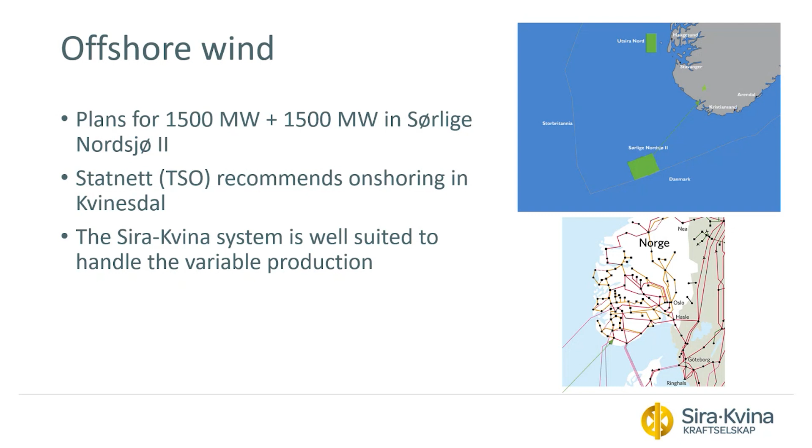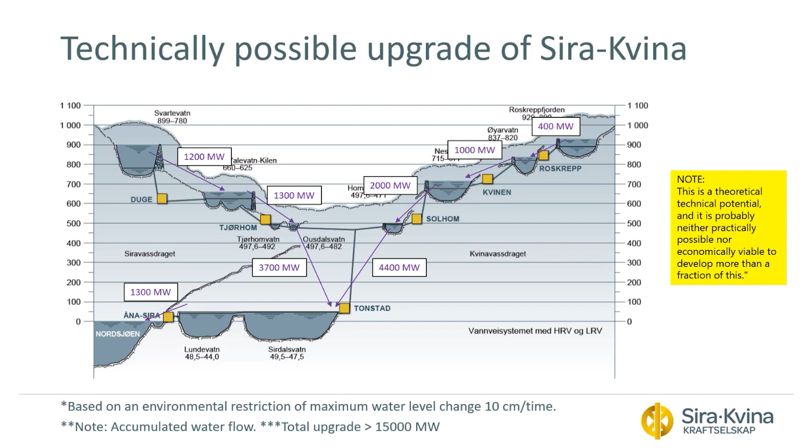So it's incredible potential. But I had to put this disclaimer over here, in yellow, that it is a theoretical potential. And it's probably not practically possible, or at least it's not economically feasible to make all that happen. So we will not build this tomorrow. Hopefully one day, but not tomorrow.

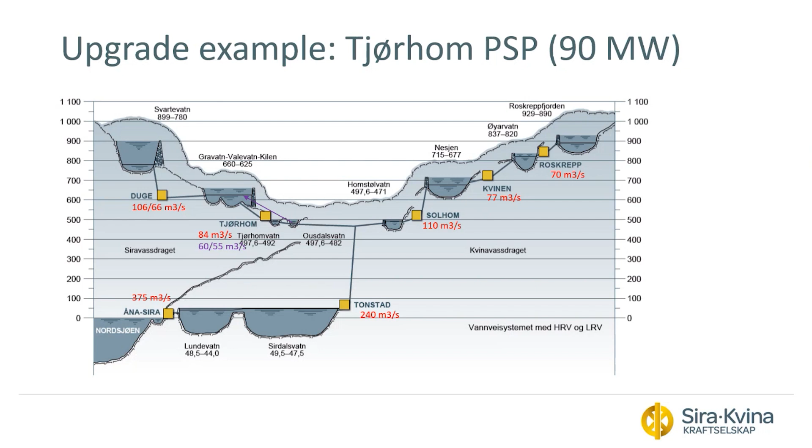So by making this power plant, we can pump from here in those situations, when the price is very low and water is coming and we don't want to use it. Then it looks like this. Today, we have a lot of inflow and we have to produce at low prices. And then we end up with this duration curve, as we see.

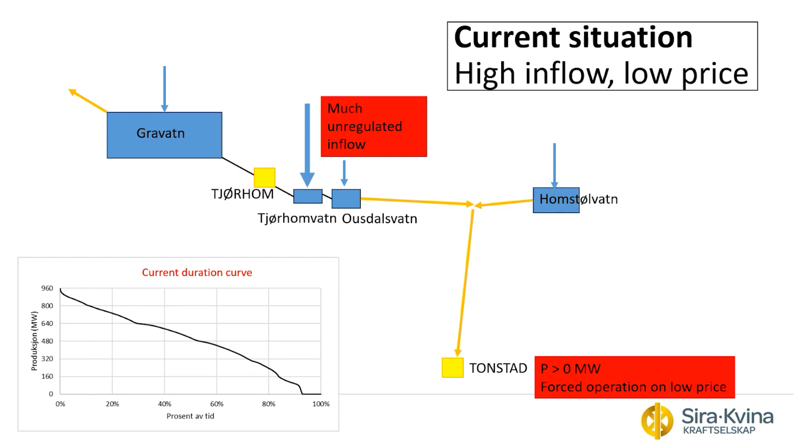What we now want to do is to instead pump that water, shut down, pump at those times, and then we get closer to this duration curve. So we produce more at a good price, less at the bad price.

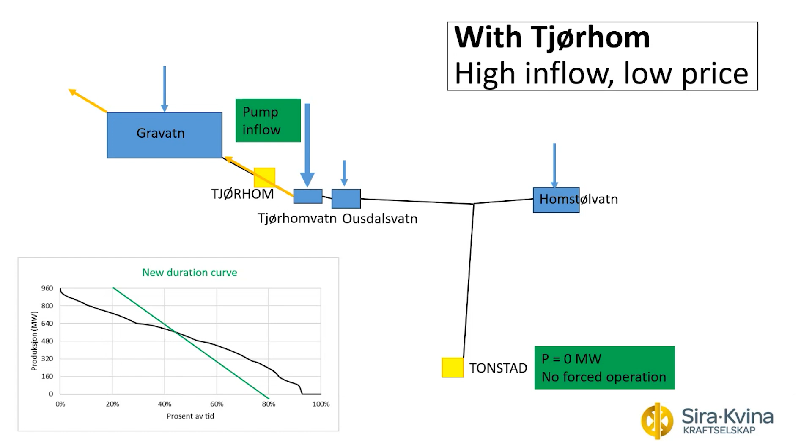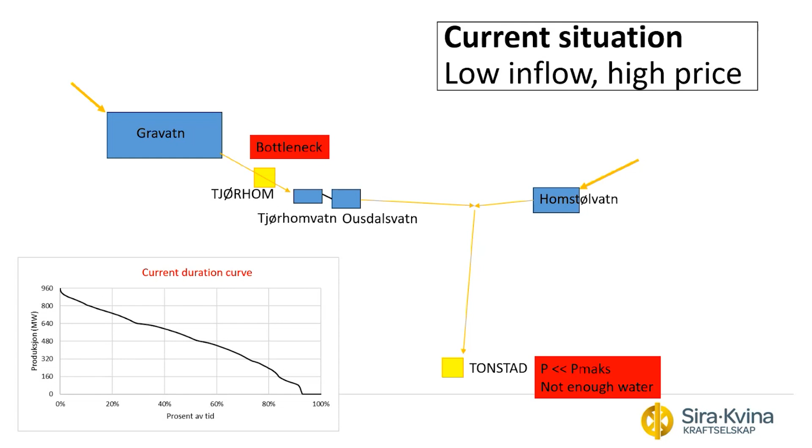And on top of it, today at Tonstad, when the price is very high and there is not so much inflow, we don't have enough water to produce maximum power. That's why here we are almost never at 960 megawatts, because we don't have enough water. So with these new power plants, we can get more water down when the price is high and inflow is low, and then we also get closer to this.

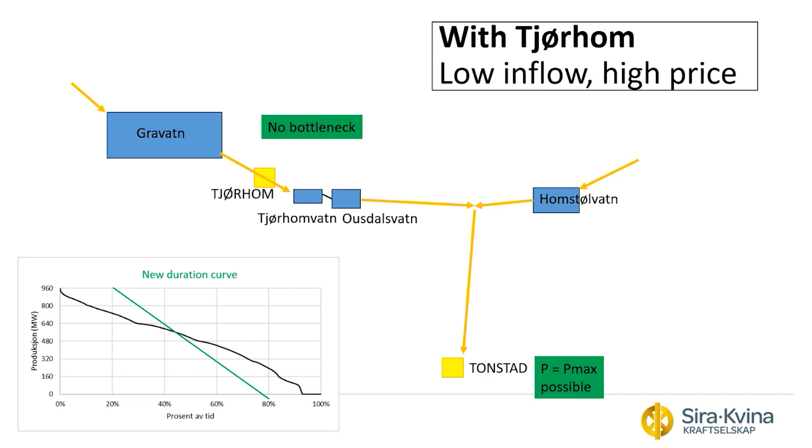We don't know the power prices in the future, extreme uncertainty. So this is kind of our challenge nowadays, we see this can have large potential, but we really have to investigate it closely to believe that we will get the money back if we invest. We're working on all this. Okay, I think I'll conclude there and then ask me afterwards if you have questions.

Thank you very much, Katka, for this insightful presentation. I think we all have a bit more of a practical view of these upgrades. So we look forward to discussing all those things with you at the Q&A at the end of the session. But for now, we will move straight into Stein-Erik's presentation.

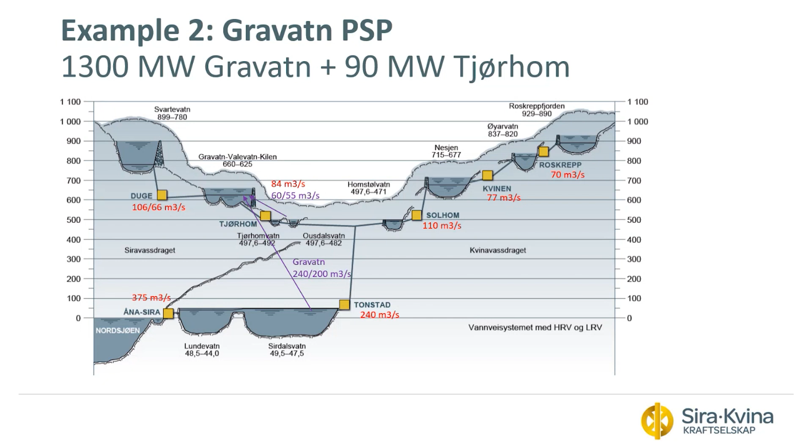So Stein-Erik Fleten is a professor at the Department of Industrial Economics and Technology Management. He is a reference in the fields of energy market modeling, risk management, and investment under uncertainty, all of which are highly relevant to our topic today, as Caspar introduced as well. So Stein-Erik, I'm looking forward to hearing what you have to say. Thank you. Thank you so much, Lydia.

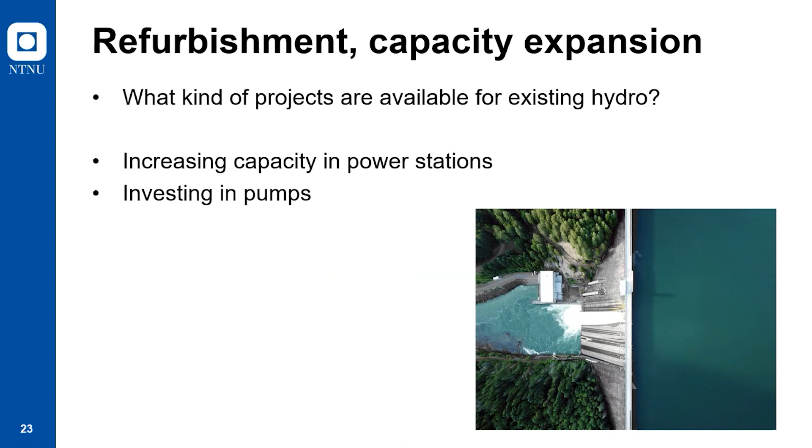So another risk for the parties involved is the changing taxation. One thing that has changed the last 2 years is the natural resource rent tax. It's been changed in terms of level. It went from 37% on top of the 22% normal profits tax to 45% in 2023.

From my point of view as an economist, this kind of tax is not the worst. Why? Well, it's so-called neutral. It means that if Sira-Kvina has a project that is profitable before the change, it will also be profitable after the change. So Sira-Kvina will still invest in this project independent of this tax change, most likely. There are details in practice, of course, but it's pretty neutral. So this is not the worst of plans.

But another tax that was introduced at the same time was a high price tax, and that's not a neutral tax. It shaves off the highest profits, and it's very detrimental to the kinds of projects we're talking about today, because it shaves off exactly the best prices that these companies need to recoup their investment. In effect it's 23% extra on top of the income above a certain level, a little less than 70 euros per megawatt hour.

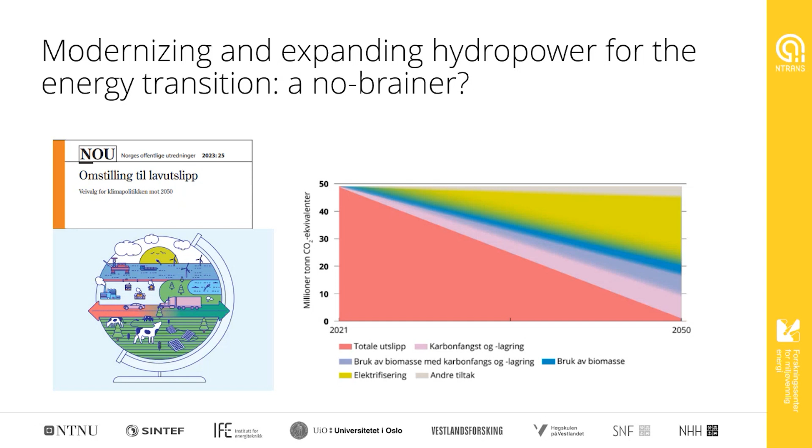Investors flocked to Norway, bought all the waterfalls, and they made enormous profits, massive profits in super short amounts of time. And the politicians were panicked to the extent that they introduced what later became known as the panic laws. Yes, I kid you not, that was their popular name. And out of this extreme free market liberalism, in competition with the more labor-oriented politicians, you had a series of these concession laws that came out of this.

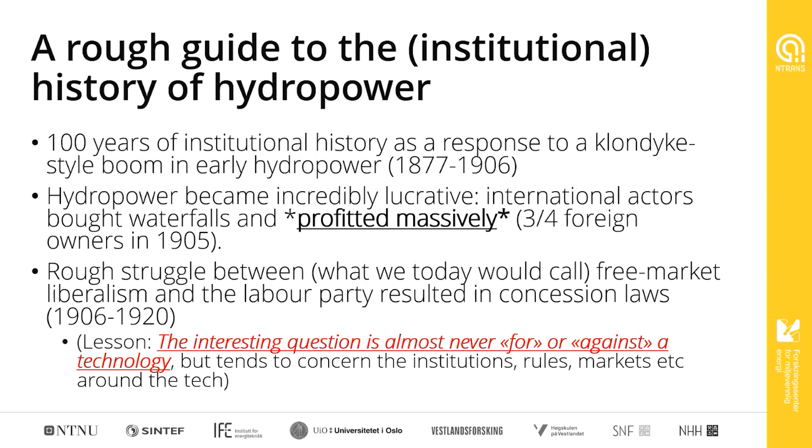And again, just to say that back then, for or against hydropower doesn't really matter. To me, then, the question is, okay, which institutions do you put in place? How do you manage the resource? How do you distribute the benefits and burdens out of this? And that was exactly the goal here, right?

You got these concession rules that are a bit special. They secured a special way of governing this resource, where you gave companies a right for between 50 and 70 years. We hear about the decadal perspective here. And there's something called Hjemfall, a huge institution in Norwegian governance of this resource, where after a company having used this resource for 50 to 70 to 80 years, depending on when it started, the resource was to go back to the state so that you could reevaluate. Are we still doing a good job? Should we revalue, or not?

And the goal here, of course, is to ensure long-term solid management of what is actually a common pool resource, which is the water, right? And the power it produces. And if you read this policy document, on this point it's pretty good. They write a bit about Hjemfall and its role in Norwegian society, and it's in Norwegian, but I'll try to translate it.

Not least, Hjemfall has contributed to providing legitimacy and acceptance. It's been legally tried, and all of these things. And they're saying that this way of organizing and dealing with this resource provides some lessons for how to think about the relationship between natural resource management and energy development in the green transition. It wasn't a very good translation on the spot, but you get the drift, right?

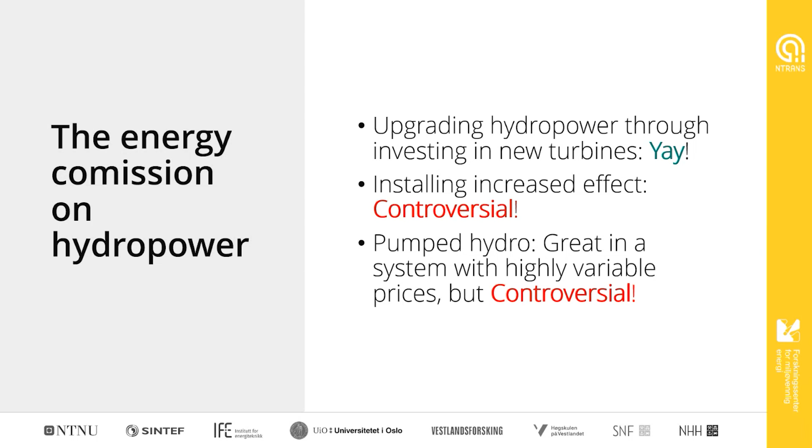And then the question is, why is it so controversial? And my argument is that, of course, it has to do with nature, the environment, the local place, these kinds of things, but it also has to do with the fact that these technology changes tend to entail institutional change and political change and social change.

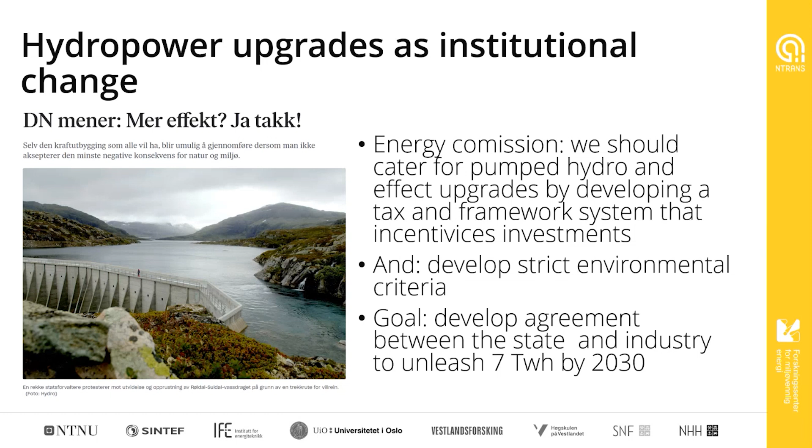The Energy Commission, this is what they recommend, should cater for pumped hydro. They should strike a deal between industry and the state to provide 7 terawatt hours by 2030, but you should also develop environmental criteria. And zooming in on what this might mean, and what it tends to mean, is that when you renew a concession, and I think the first speaker probably has a lot more experience on the practical side and struggles about these things than I have, it means you have to reevaluate the environmental criteria.

So the question then is, do we have the same environmental standards today as we had in 1950 and 1960? In most instances, you would clearly say, no, it doesn't make sense anymore. We know better than they did in the 50s and 60s. There's a strong EU integration now, right? These massive discussions about whether or not Norwegian hydropower is affected by the EU taxonomy for sustainable investments. And there's been strong pushback actually by the industry, and we can discuss if it's true or not, to some of these developments.

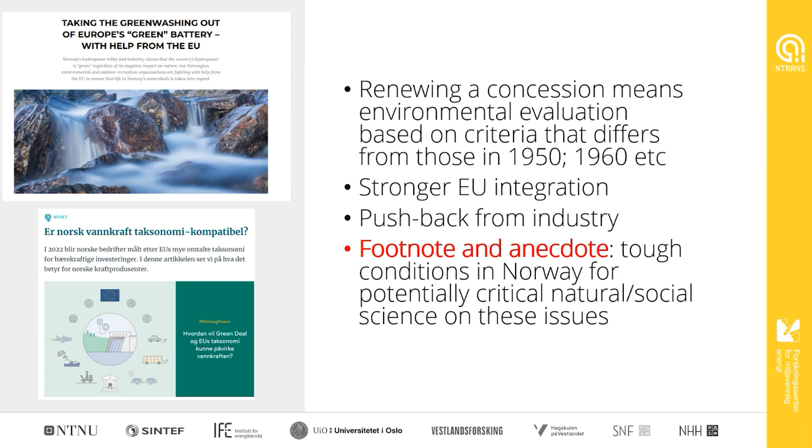And as a quick note, I will not say which project or which actors, but I know that there's been research in Norway where industry has strongly pushed against doing studies on acceptance and on nature-oriented issues in Norway. So I have colleagues who have had to go to Sweden to study these things, right? Because they haven't been allowed in Norway. And you're laughing because you know what I'm talking about. So this industry is also an industry which is not neutral. It's been quite conservative on these issues.

This is now a bit speculative, because I'm basing this next part of the story, which is also not part of my research, on some newspaper coverage. You should always be careful about that. I haven't researched this very properly. But this is a case that has been heavily debated in Norway, right? Or at least in parts of Norway.

And it's a case where a company called Hydro, many of you know it, they acquired one of these concessions in 1962, so a long time ago, to develop Røldal-Suldal, a place southwest of Norway, and they have developed this to fuel the Karmøy industrial sites that Hydro has down there. And what they've done, and it's all legal, so this is not saying that it's a scam or anything like that, but through various ways of working, they've been able to challenge this idea of hjemfall by developing a new company. So they've merged parts of Hydro with Lyse to develop a new power company, and they're doing an upgrade now.

The upgrade is in the order of 5 to 7 billion NOK, I think, maybe a little more. It's a massive project, right? You heard from the first speaker. When you hear upgrade, you can think that it's a little thing, you just do the same. It's a massive project. And the environmental aspects have been hugely contested.

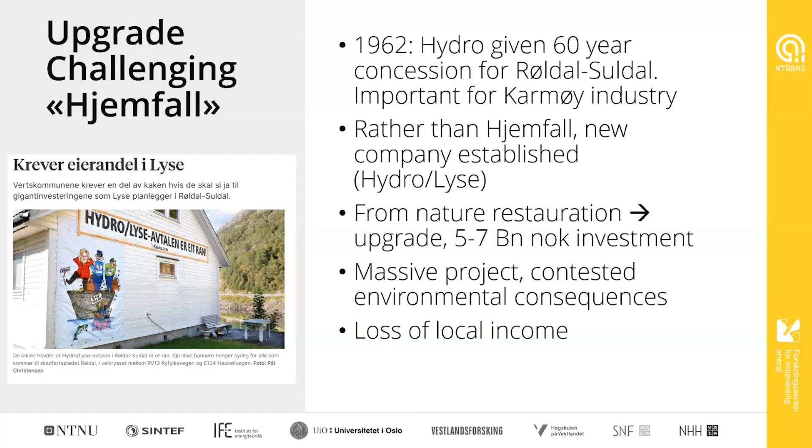Another part of this, which has been just as important, I think, is this loss of the hjemfall, which means that the municipalities here, they at least claim that they get a lot less than they originally would, and they get no ownership in this, which they would if the regime had remained stable policy-wise as it was. So these are a lot of the discussions, right? Who should benefit from this? Who should earn the most? And then we heard Rob talk about risk here, and that's also a question, I guess.

If you look back in time to the 1950s and 60s, I think I'm out of battery.

If they would have been awarded this with today's standards... so they kind of had something for a long time, and we then hold on to that through making some tweaks to the institutional configuration. So what does all this mean in terms of transition?

Well, there is currently a massive lack of public legitimacy for the energy transition. I mean, no political project these days is more contested in the Norwegian and European context than this energy transition. And part of this, in general, is due to a lack of trust in these actors and that they are taking care of these resources for the good of society. There's a clear unequal distribution of benefits and burdens. And the already very wealthy and powerful tend to gain from these situations where there's systematic

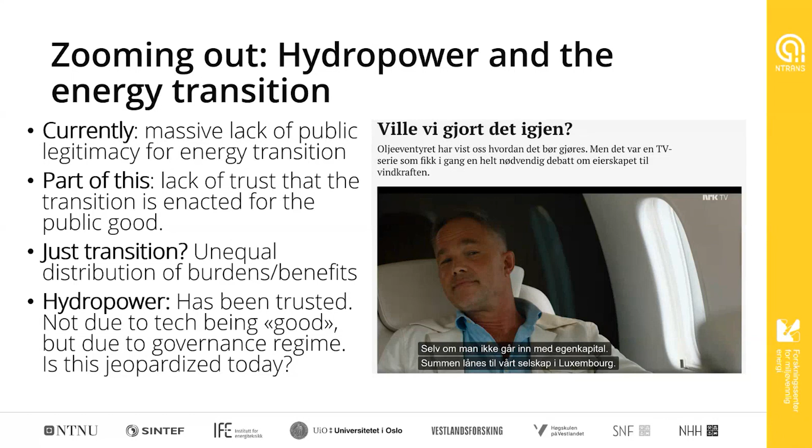losses going on here. And in a Norwegian situation, hydropower has been extremely well trusted. And my fear is that we may be jeopardizing that now. Although, caveat here, further research is needed on that part.

Okay, to wrap up, the most undermining in discussions, I think, is being for or against technologies. So don't do it. Just don't do it. The political context, institutions, culture, the concrete practices, relation to nature, economy, all of these things always matter, and they differ between sites. So we need to understand that, right? And that means that we also need to take care of these things when it comes to upgrades.

And what that means. So when we change technologies, we change all these relations, and that means that we also need to think about the stories that we tell the population about why we need this stuff, right? Which society are we going to? So I think that's my story.

Thank you very much for this eye-opening presentation. We will finish this round of presentations with Ana Adeva Bustos, research scientist at SINTEF Energy. She's responsible for the ReAdapt project, which looks into adapting hydropower to future climate extremes. Her research focuses, among other things, on interactions between hydropower and the environment. So her input will be valuable to our discussion. Anna, take it away. Thank you.

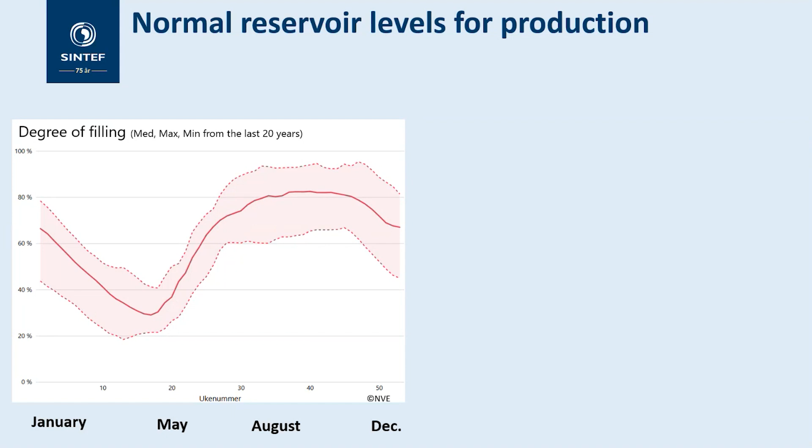But first, let's talk about what is the traditional way of managing a reservoir. So in this case, we have the typical curve of filling the reservoirs, and we see the max, the min, and the median over a year. And there are two specific key points. The one is when the reservoir will start filling, and it also matches the snowmelt period.

And here is a video of Roskreppfjord, one of the upper ones in the system of Sira-Kvina. And we see how the ice and the snow are melting, and then the water levels rise. And then it will stabilize during summer until winter, where we actually start needing the energy, and then there will be production and water levels will be reduced.

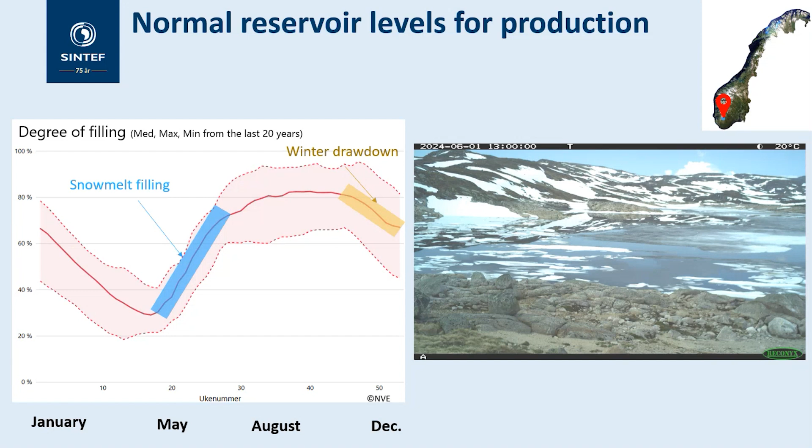But this picture will change a lot in the future if we have pumping. There will not be this way of producing. The water levels will be increasing and decreasing, increasing and decreasing much more often.

Another important aspect is that the reservoirs actually have a dynamic in temperature, and you can have two times a year where the water is mixed, that will be spring and autumn, and then two times a year where the water will be in a thermal stratification. So in summer, you will have the warmer water in the upper part because it will be heated, and then colder down. And in winter, there will be ice, cold water, and then warmer water below on the bottom. And you will understand that this is important because it will also be impacted by pumping, and it's also impacted in the traditional.

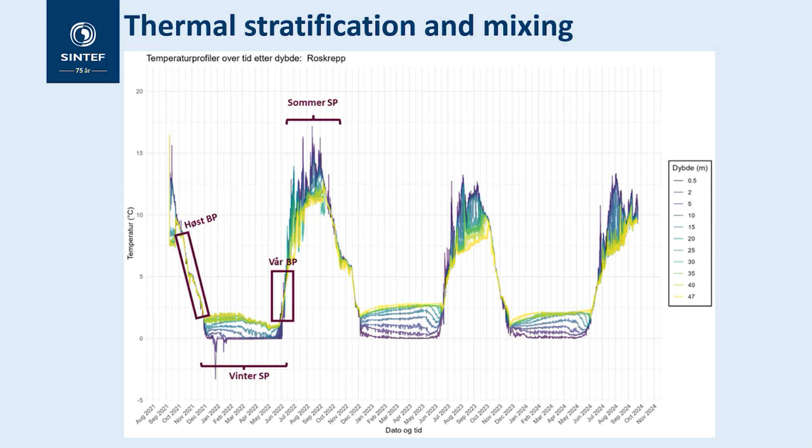The picture is from a sensor that we deployed in August 2021 in Roskrepp in the Sira-Kvina system. The sensors are deployed at different depths in the reservoir, so we can clearly see these periods that I just mentioned: mixing during spring and autumn, and then the stratification during winter and summer, and also the inverse stratification where the deepest sensors are measuring the warmest water.

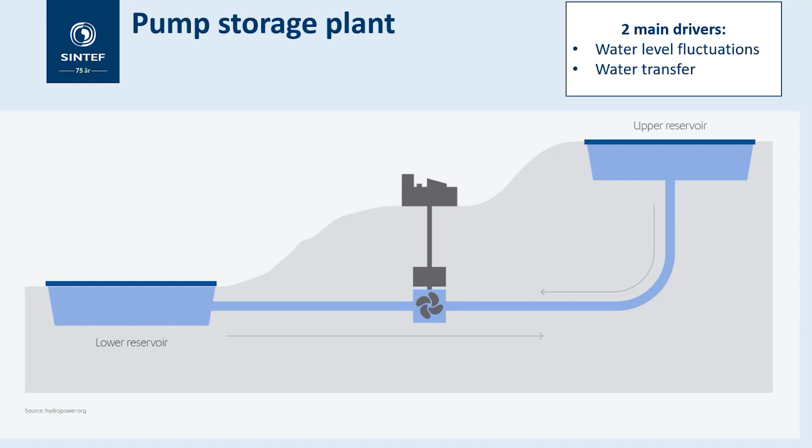So what are we going to expect? When we have pumping, we will have two main drivers: water level fluctuation, and also we will be transferring water from one reservoir to another with different physical chemistry and different characteristics. So the water level will change when you produce, and then it will increase when you pump back. And of course, as I mentioned, temperature will also be transferred.

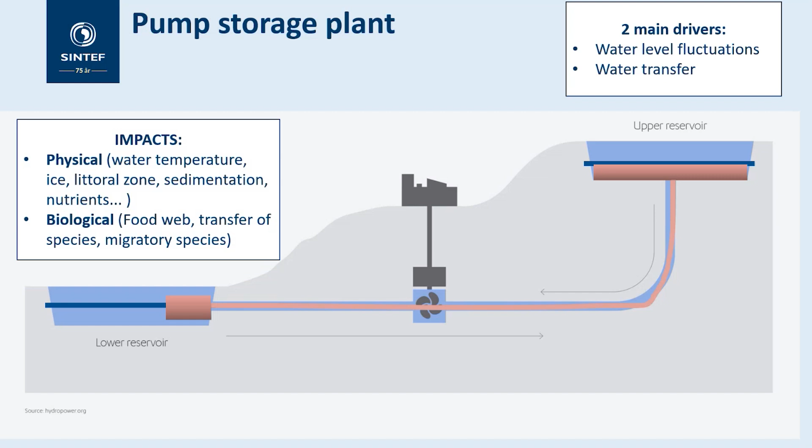So if you transfer from the bottom of your reservoir when it is winter, you will be taking warmer water into a reservoir and releasing it mainly at the surface, where it's supposed to be cold. So you are also impacting this thermal stratification. There are other impacts, for example, sedimentation problems and nutrient transportation. You will impact the littoral zone or the shorelines of your reservoir and the habitats.

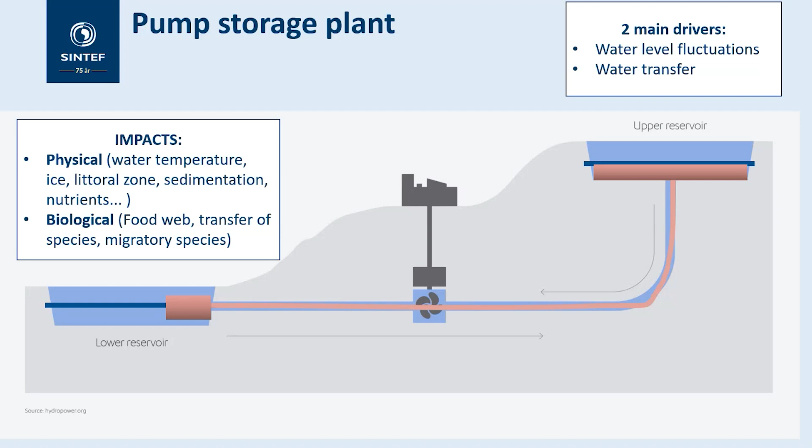And you will have biological impacts; for example, you will affect the food web, and you will transfer species, because species that live in one can be transferred to another reservoir. These can also be invasive species. And you will also impact migratory species in terms of fish, but also other species, as we have seen, reindeer, for example.

So I will show you specific examples of what we have actually simulated, because until today, we don't have a case in Norway that does pumping as we expect it will be in the future. As Kaspar mentioned, we have some pumping, but it's more on a seasonal basis. But we are expecting that this pumping will change and have much more fluctuations in the future. So I will show you examples of thermal effects, ice cover, and effects on the littoral zone.

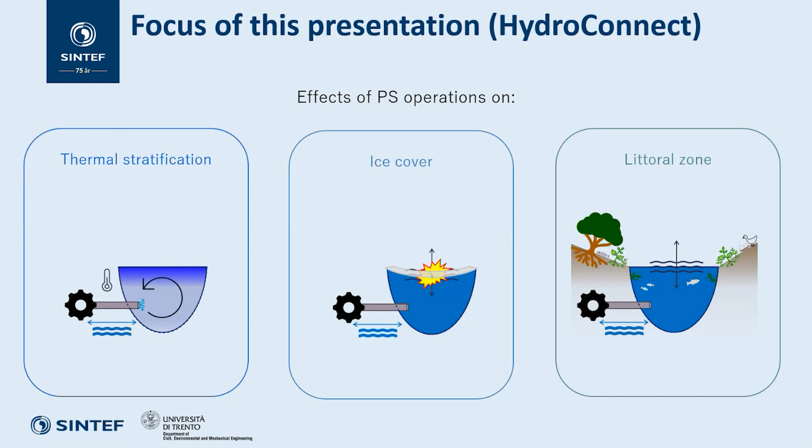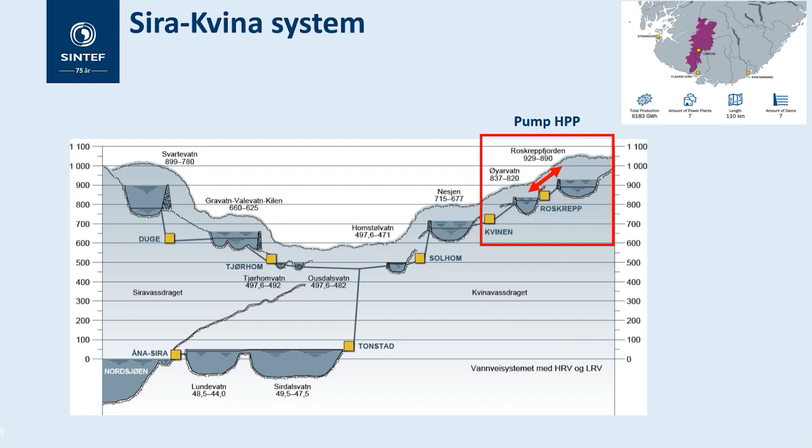So this is the system you have already seen, and we are changing from a conventional hydropower plant to pumping through our modeling. And I will show you examples for the temperature in two different segments. We have the upper reservoir and the lower one. And I will show examples on segments close to the inlet and outlet, close to the structures, and also two segments that are a bit far from the structure.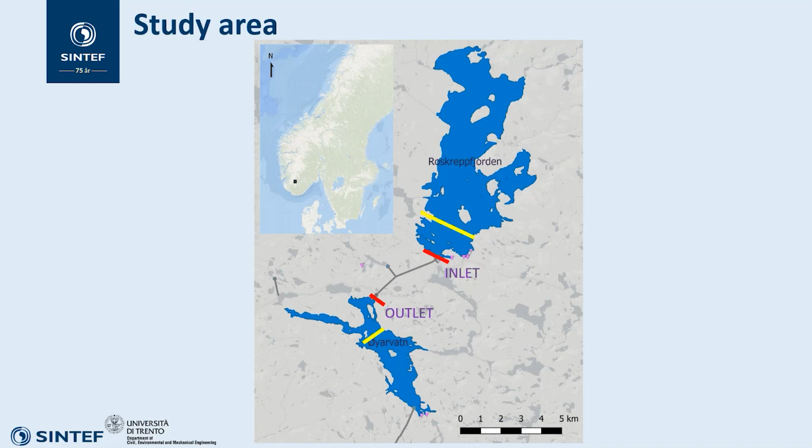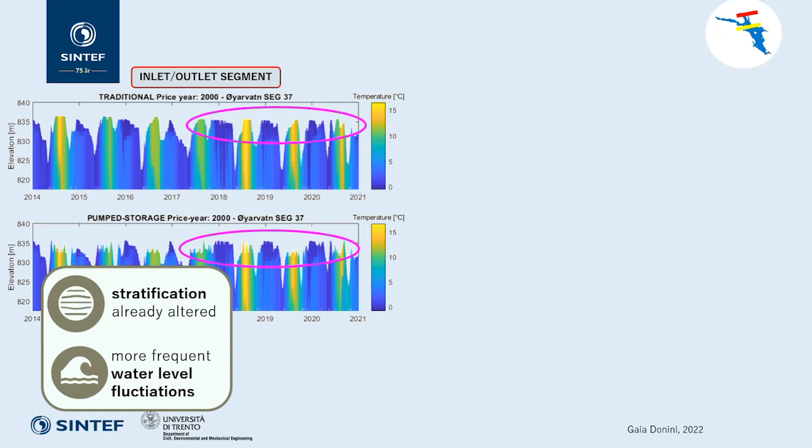We see the same in Øyarvatn, a lower reservoir close to the structure. We see that there is an impact, but because Øyarvatn was already under traditional operation, it was already receiving water, so the stratification was already altered. But what we see is more frequent water level fluctuations. And it's different from the one that is far away from the structure. So in conclusion, we see that the closer to the structure, the more impacts you will see compared with far away.

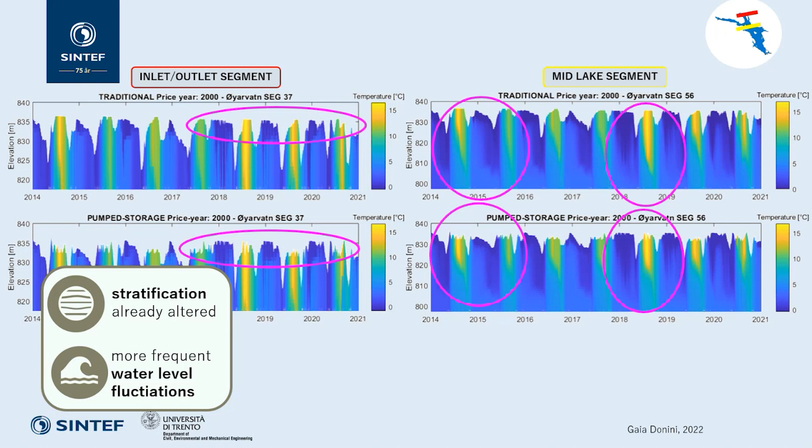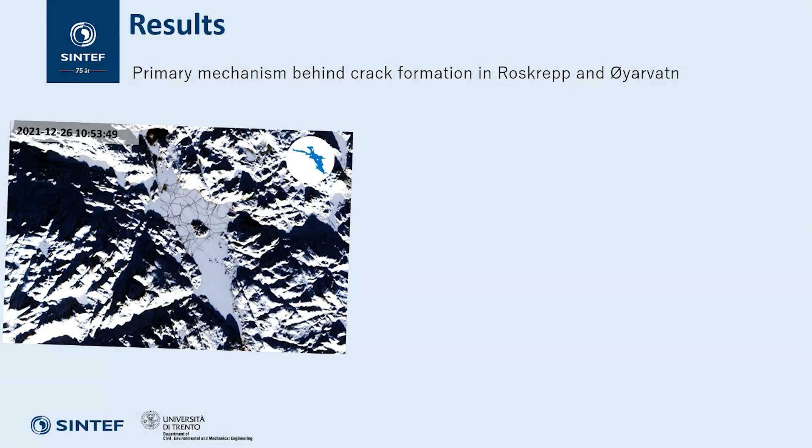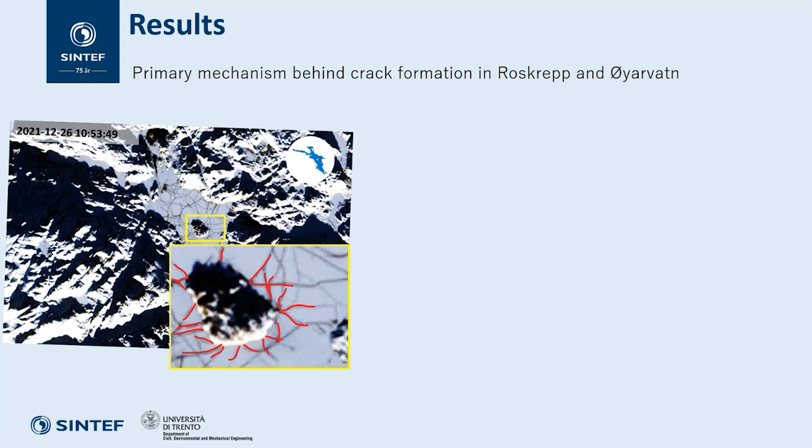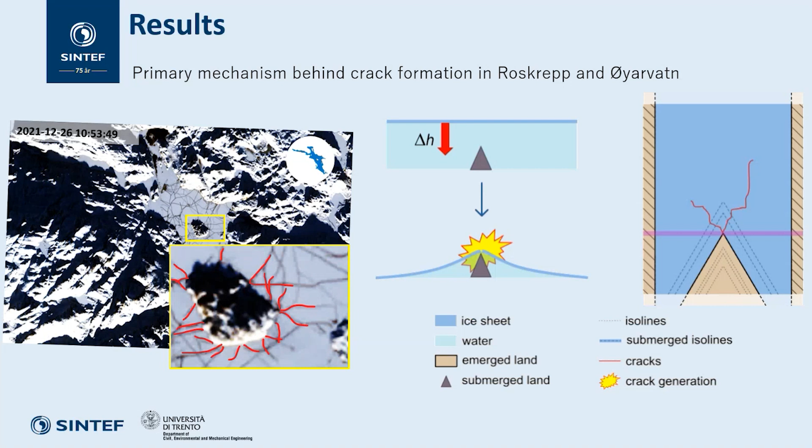We were also looking at the mechanisms behind possible cracks in ice. What we have seen is that one thing that also has an impact is where your morphology is quite challenging or complicated. In this case, you have an island, so the bathymetry will be a bit rough under this island. The primary mechanism we have seen is when you lower the water level, there will be pressure on the ice touching this bathymetry, and then the cracks will start forming. But keep in mind that cracks don't mean it will be totally open. It's just cracks on the surface.

That is a report that includes many different indices. That is also linked with what Thomas mentioned, that it's important to have environmental criteria to classify the impact and also to define new constraints related to a new way of producing, because we are still using constraints from very far back in time that were in the concessions, and not much has been done since then. So we are on a good track, I think, to start changing this, and we also need to comply with the legislation. So it's not really a choice. We have to do it.

So we also see that, when you have traditional and pumping, pumping will fall in a category that is a bit less severe than if you operate traditionally, because you will not lower your water levels so much. But if you also implement ramping constraints in your reservoir, you will improve these water level fluctuations even more. But as I said, these are all simulations, because until today we don't have a real case. But that's also good because we have opportunity for research.

So what can we expect from modernizing Norwegian hydropower? As I mentioned, we will have more water level fluctuation. But what does it really mean for the quality of the reservoir? Well, we still need more research, because we have some indications, but since we have not seen it in reality, we need to start monitoring our reservoirs in order to have a background to provide environmental restrictions and constraints with scientific knowledge behind them.

Also, there will be thermal stratification and ice cover impacted, mostly near the structures. And beyond that, what it will mean for the entire lake, we still need more research. And as we have seen from the previous presenters, we know there is a very huge potential of increasing flexibility through pumping, but we need to have a good background to support environmental restrictions and minimize the potential impacts.

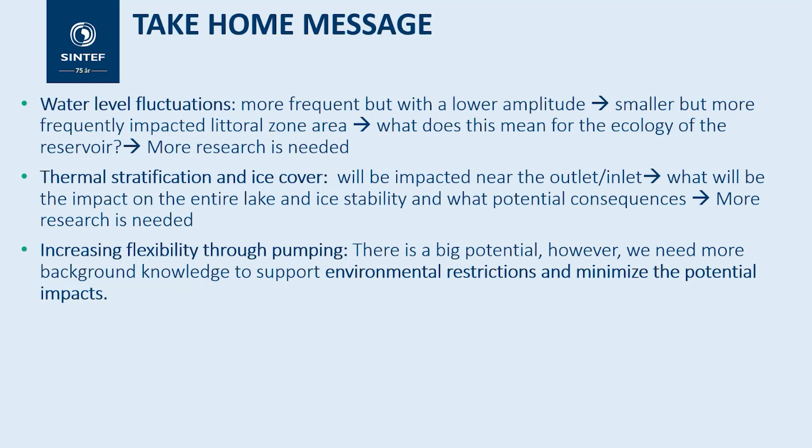But I wanted to end that even if I'm saying all the time we need more research, I think we are good on time to start doing it. There is pressure from the politicians, and there is also interest from the hydropower companies themselves in having more research being done, collecting data, and through monitoring and then implementing mitigation measures, I think it's possible, but we have to take action. Thank you.